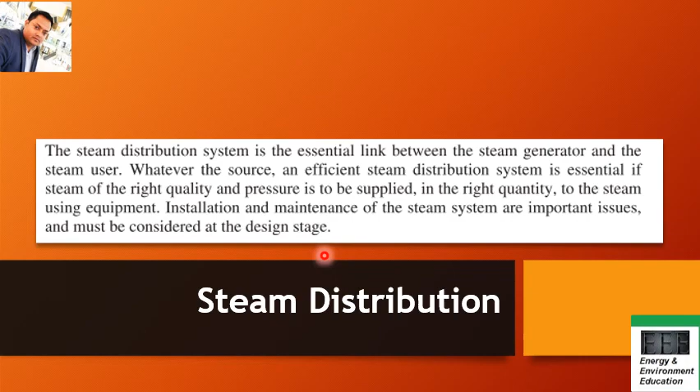The steam generated in the boiler must be conveyed through pipe work to the point where its heat energy is required. This is the boiler where the steam is generated, and this is the area where the steam is used inside the plant at different processes, friends. Initially, there will be one or more main pipes or steam mains. So at the start you have one pipe, then it gets distributed to different areas within the plant with the help of different small pipes, friends.

So basically, the steam generated in the boiler must be conveyed through pipe work to the point where its heat energy is required. Steam is generated here and has to be conveyed to the point where the steam will be utilized, the user point. Initially there will be one or more main pipes or steam mains which carry steam from the boiler in the general direction of the steam using plant. Smaller branch pipes can then carry the steam to the individual pieces of equipment.

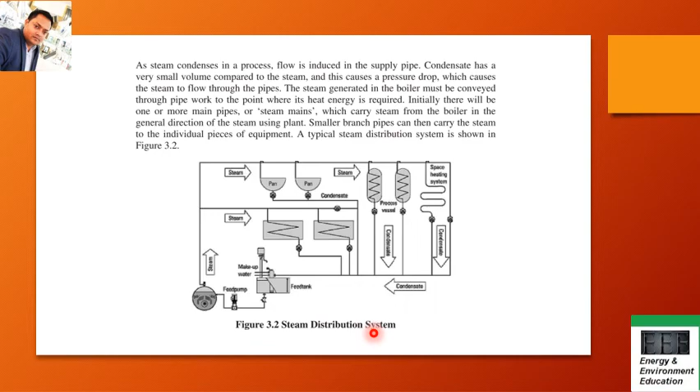So now comes the working pressure. Working pressure is very much important, friends. This means how much pressure you should maintain. First of all, you should understand the key point, the maximum safe working pressure of the boiler. The pressure that you are maintaining should not exceed the maximum safe working pressure.

Suppose 9 kg per centimeter square is the maximum working pressure. The boiler should not generate at a pressure of 10 or 12. This will be really hazardous, friend. The maximum safe working pressure of the boiler should be kept in mind when you generate the steam. The second thing is the minimum pressure.

Now pressure should not be too low either; if 5 kg per centimeter square of pressure is the minimum required, it should not be 4 or 3. So the maximum and the minimum value should be kept in mind while you generate the steam, and also when you distribute the steam.

This means when you generate it and when you distribute it, suppose at the user point, at the end point, 5 kg per centimeter square is the minimum pressure required for the equipment or for the process. Now if you are supplying at 4 kg per centimeter square, or suppose there are some losses inside the pipe, and for that reason the pressure coming into the equipment or the process end is 4 instead of 5, which is the minimum value, in that case the process will be hampered, friends.

So you have to keep in mind the maximum safe pressure and the minimum pressure that has to be generated and also supplied or distributed, friends. As steam passes through the distribution pipe work, it will inevitably lose pressure too. There are different reasons why steam pressure is lost. The first one is the frictional resistance within the pipe work. The second is the condensation within the pipe work. So these are the two points you should understand.

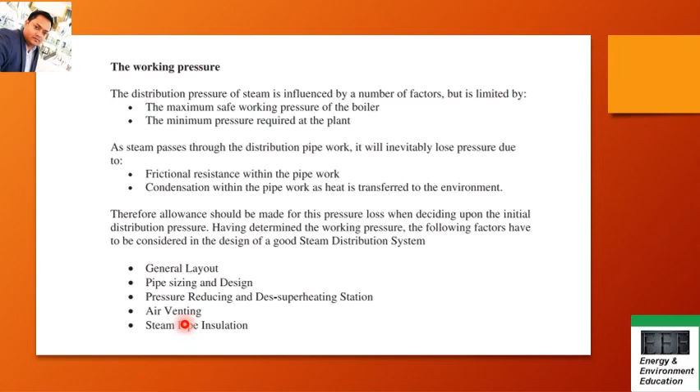Having determined the working pressure, the following factors have to be considered in the design of a good steam distribution system. They may also ask you in the exam what things you should remember while designing a good steam distribution system. First is the general layout, pipe sizing and design, pressure reducing and de-superheating station, air venting, and steam pipe insulation. These are the 5 points that are important while designing a good steam distribution system, friends. Remember them; from the exam point of view, this slide is very important.

As I said in the last slide, the general layout is very important. General layout and location of the steam consuming equipment is of great importance in efficient distribution of steam. The point where the steam is used is very important, and the general layout of the entire steam system should be designed in a proper way, friends. Steam pipe should be laid by the shortest possible distance rather than following a building layout or road, etc. The point where the steam is used should be at minimum distance from the point where it is generated.

If you keep the distance from the generation point to the user's point as low as possible, this will give you better steam distribution, low pressure drop, and efficient usage of steam, friends. However, this may come in the way of aesthetic design and the architect's plan, and compromise may be necessary while laying new pipes. So you need to properly design the entire distribution system, understand the general layout of the plant and how you can efficiently use the steam at the user point, friends.

Steam piping, pipe sizing and design are equally important: how you design the pipes and what size of pipes is required. Any modification and alteration in the existing steam piping for supplying higher quality steam at right pressure and quantity must consider the following points. So you must understand pipe sizing; it is very important. The objective of the steam distribution system is to supply steam at the correct pressure to the point of use.

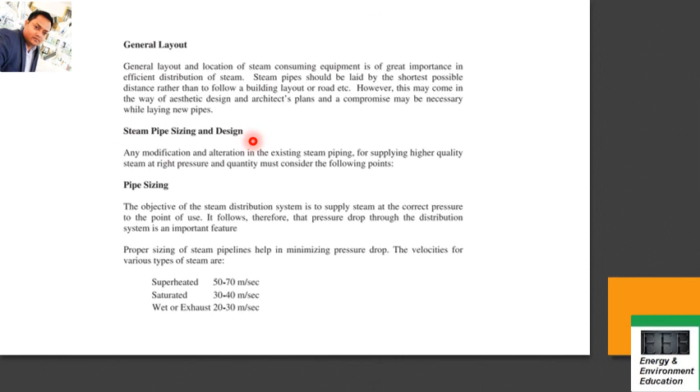So this is very much important. This slide is important because you must understand why general layout is important, why steam piping sizing and designing is important, friends. So the ultimate goal is to meet the pressure required at the user end, friends.

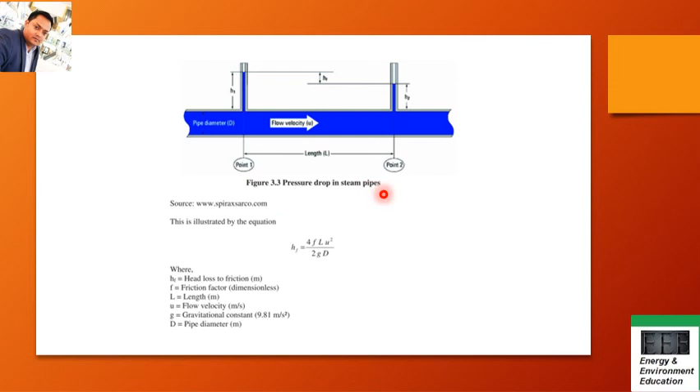So in that case, you need to understand this formula and the key points, and also know how to use this formula while calculating the pressure drop in the exam, friends. So when they ask you this pressure drop calculation for the steam pipes, you must use this formula to solve the numerical, friends, in the exam.

So you must understand this formula, remember this formula, and know how to use this formula, because they may straight away ask you to calculate this type of numerical. They may give you short type of questions. Also this formula can be used in a long answer type question, friends, where they will not directly ask you this type of question. They may indirectly ask it as part of other important questions in the long answer type questions. So you must understand this formula and the uses of this formula, friends.

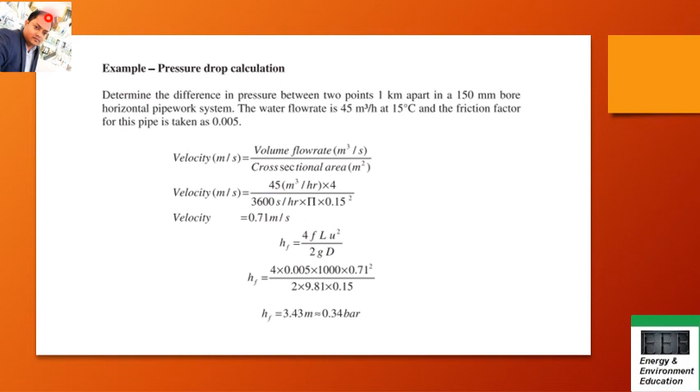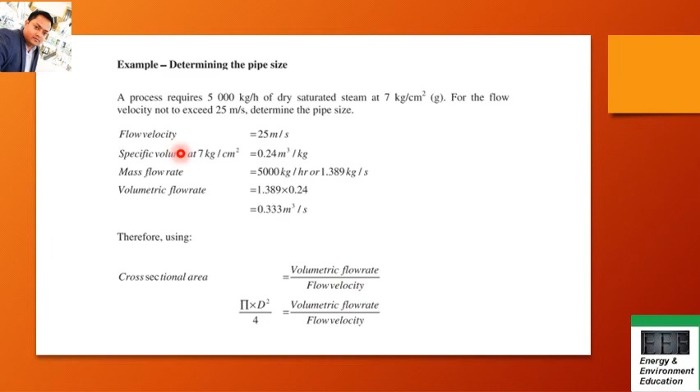So as shown in the last slide of the formula, friends, we are calculating the d square, basically the size of the pipe. So we use all these other parameters, multiply them and then calculate the d, that is the diameter of the pipe, which is the size of the pipe, friends. So you are using the formula that I showed you in the last slide to calculate this d, or the size of the pipe. So this is the important formula.

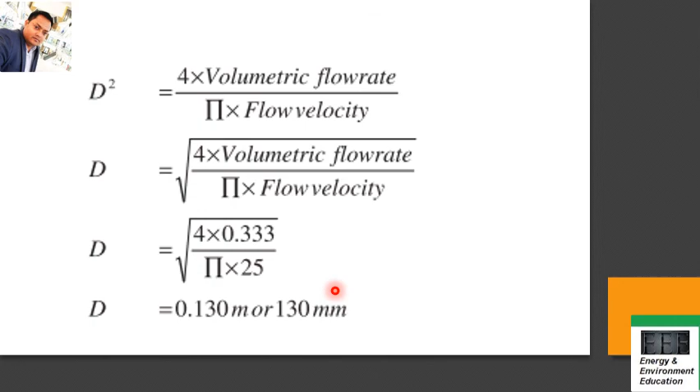So two formulas I have shown you here which are equally important, for determining the pressure drop and also the size of the pipe, friends. And these two formulas can come in the exam. They have come a number of times earlier also, and in the coming exam also this type of numericals can come, friends.